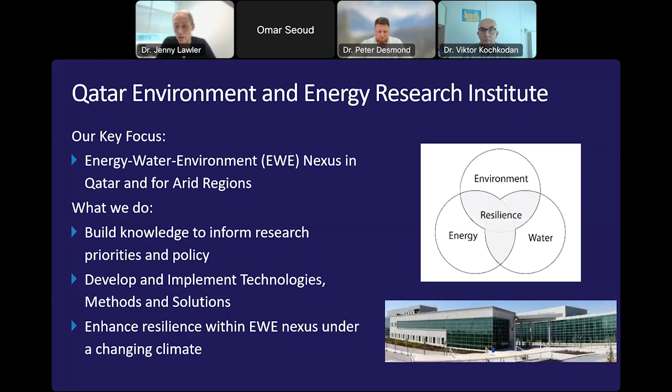Peter, maybe you'd like to introduce the Division of Sustainable Development at the college? Yeah, sure thing. So I'm coming from the Division of Sustainable Development, and we're working across also the water, energy, and food nexus.

We offer PhD and master programs in sustainable environment and sustainable energy. We have around 6 faculty in all, each representing an area of the water, energy, and food nexus, similar to QEERI's approach, how they integrate and complement each other. As a result, this gives us a way to work collaboratively to find solutions for sustainable growth within Qatar and the region in arid environments.

Yeah, that's fantastic. And I think it's important to note that we have a very nicely developing research ecosystem here in Qatar. Hamad bin Khalifa University is just one of the research performing entities here. Hamad bin Khalifa University and QEERI were founded in 2011, so quite well developed at this point, making a good impact on research for the nexus within the country.

So the focus today is on Qatar's water sector and sustainability in water for arid countries such as Qatar. Some of you may or may not know that Qatar is classed as an extremely water scarce country, so we have very, very little in the way of freshwater resources available. Although it seems that we have absolutely no scarcity of water at all.

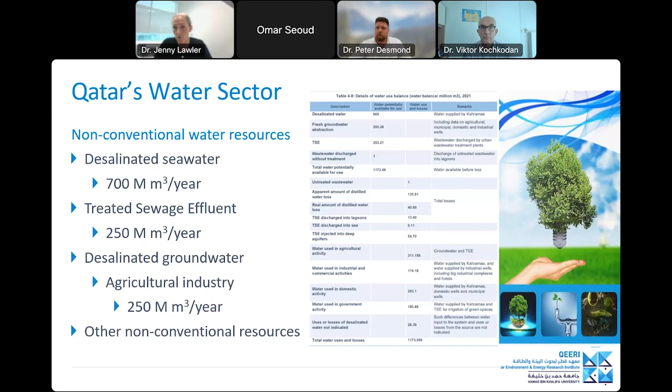So we have a really good and thriving water and wastewater sector in Qatar. There's been a huge amount of investment into it and a huge amount of thought put into it in terms of management of it as a water sector.

So I'll tell you a little bit about desalination first. As I said, we're surrounded by salty water - it's all around us and under our feet in the ground, and we're reliant on desalination technologies. Speaking to people who live here, the general public tends to be a little suspicious of desalination, the quality of water produced, and whether it's safe or not. Hopefully we'll dispel a few of those myths or assuage a few of those fears today.

In Qatar, there are two major ways we're desalinating seawater for municipal use: thermal desalination and membrane desalination. The thermal plants would have been the first desalination plants established in Qatar and across the GCC, back as far as the 1950s, when we first had a large-scale desalination plant here in Qatar.

It's a process that's typically been dependent on the electricity production process. When you burn gas in a gas turbine to produce electricity, you also produce heat from burning the gas, and that heat is used in thermal desalination to purify the water. Similar to using heat to boil a pot of water or a kettle, the steam that comes off doesn't have any salt in it. That's then condensed, going from vapor back into liquid form, and it's pretty much salt-free. That's the thermal desalination process.

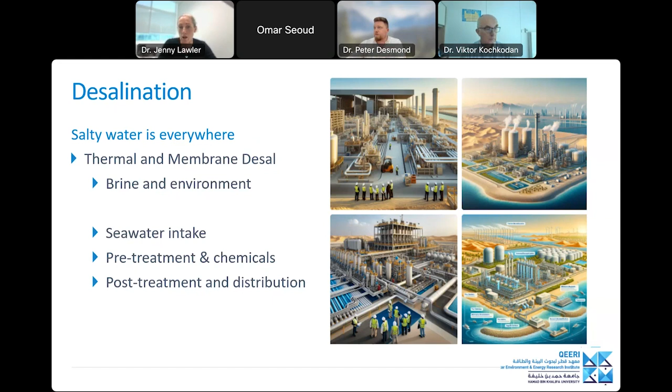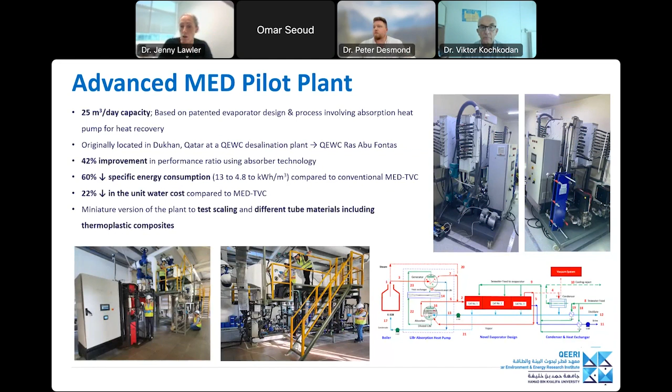Just a little plug for where research can come in: QEERI Research in Desalination Brine Management is quite advanced. We have a pilot plant in Ras Abu Fontas, one of the desalination plants, and at other desalination plants around the place, where we're looking at improving energy efficiency, decarbonising the sector, and hopefully minimising the impact of brine on the marine environment.

So then the other side of the coin is you've received this desalinated seawater at your house. Now it's high quality, it's fresh. You can use it for cooking, for drinking, for all of your household needs. And we also use it in industry for cooling, for construction, for car washing, and everything like that.

The other side of the coin is the wastewater. We have extensive wastewater collection networks managed by Ashghal, the Public Works Authority, and we have very high class wastewater treatment plants in Qatar.

That treated wastewater, which comprises municipal wastewater, industrial wastewater, even shallow pumped groundwater, is mandated under Qatar National Development Strategy for 100% reuse.

So Qatar is very advanced in that regard, and it's extensively reused in district cooling. If you live at the Pearl or Lusail or other areas that have district cooling, it's almost 100% reuse water that's in the cooling systems.

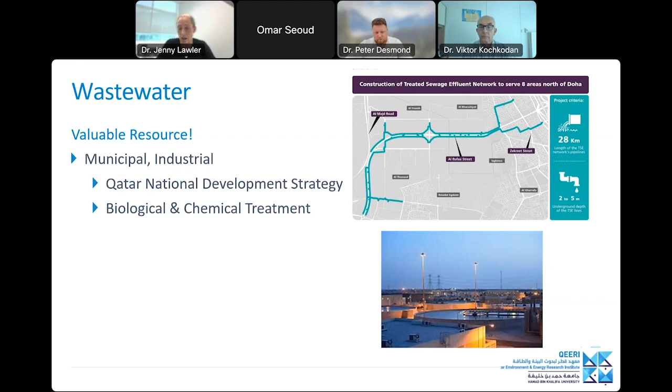And we also reuse it extensively in irrigation of landscaping, and also in the growth of fodder in the country, and then in other non-drinking water or non-potable needs, such as in construction.

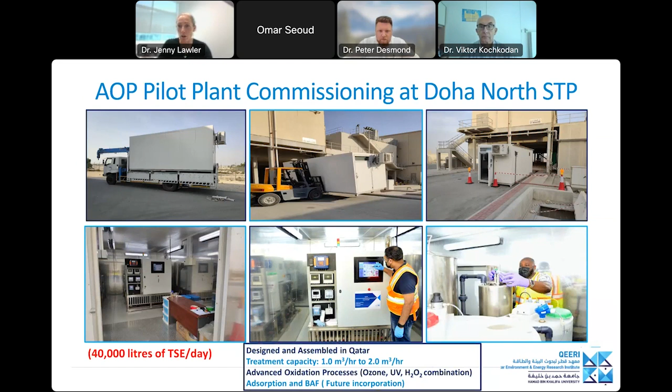And just another little plug there, QEERI has a pilot plant in Doha North Wastewater Treatment Plant, which looks at final polishing and improving the quality of that type of water.

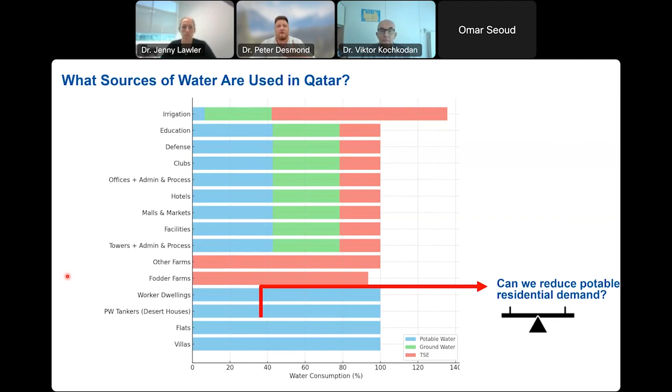But one of the challenges that still exists is the extensive use of potable water for perhaps non-potable application within residential settings, in terms of apartments or offices or within villas. And so the question is, what can we do ourselves as individuals to lower our water footprint, combining with some new innovations in the area of urban water management.

But we can have extensive treatment, and certainly what's been done in Qatar is reuse of the wastewater. So we see mechanical treatment, biological treatment to remove some nutrients or organics, and then an extensive post-treatment to bring the water quality up to a suitable level to allow it to be reused. This is typically where the TSE is coming from, and how it can be distributed in its dedicated network for purposes of irrigation or also cooling.

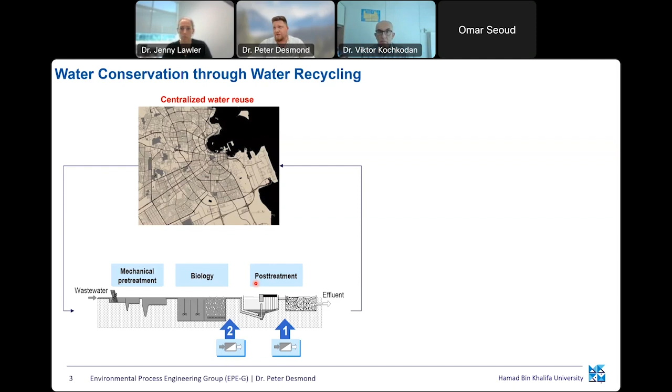So this is what we would call an example of centralized water reuse. Qatar is doing a really incredible job in the implementation of centralized water reuse through the operation of dedicated water reuse facilities, but also dedicated water distribution networks, having a potable distribution line and also a treated sewage or recycled water distribution network, running in parallel as a fully segregated system.

And Qatar is also doing a very good job in the concept also termed decentralized water reuse. So we look here at water reuse not at a city level, but within an individual unit within the built environment. This could be an office building, this could be your own villa, it could be your own home. There's many ways in which we can have the aspects of decentralized water reuse.

So what we see here is collection and separation of different types of water. We see gray water being collected from hand washing or shower areas, separated from black water, which is coming from the toilets, within buildings of truly sustainable developments. We'll see an example of what we mean by that in the next slide. We're able to collect these different water streams with different degrees of pollution and then treat them for different applications. So we see collection of gray water, from hand washing, and ultimately we are able to use this for irrigation.

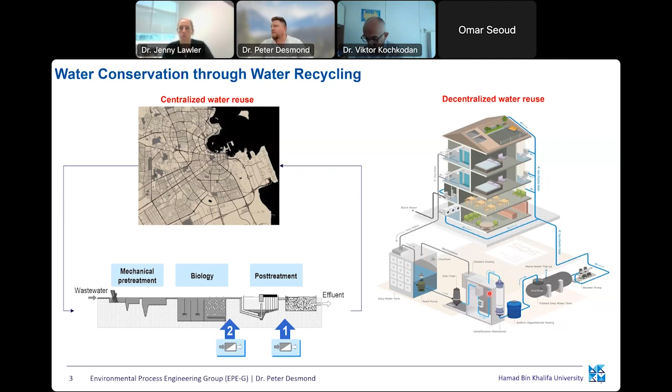We have an example of this in Education City, where we have the possibility to reuse grey water for non-potable applications. When we think of decentralized water reuse, Qatar again is leading the way. We see the development of Msheireb Downtown, which has reported source separation of grey water from black water, which reduces dependency on potable water, in this case for toilet flushing.

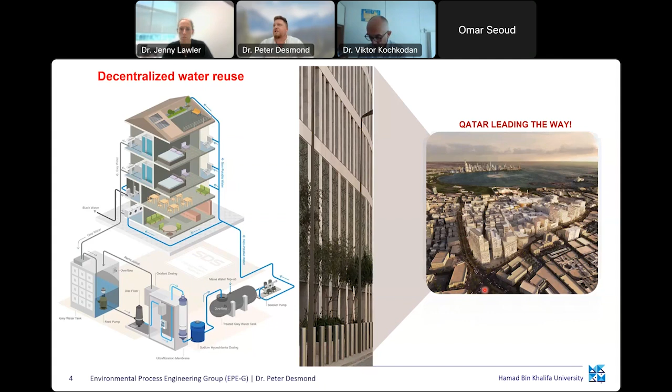As I understand from publicly available information, toilet flush water in Msheireb Downtown uses TSE, facilitated ultimately by source separation. Also within Education City, we have source separation of grey water from black water, and this serves as an ideal test bed or living laboratory to study the use of treated grey water for potential irrigation of blue-green infrastructure.

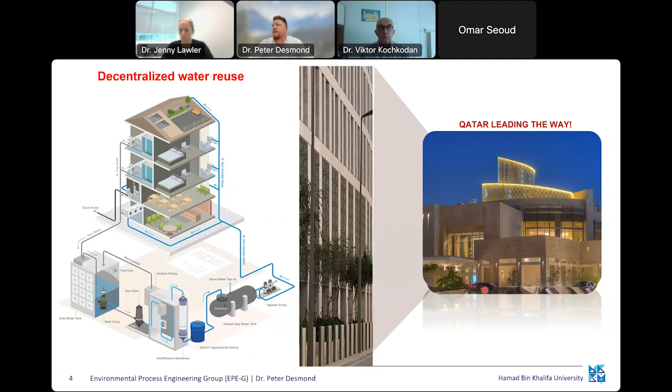When we look inside our own homes, we see potential for recovery not just of water but also nutrients. It's possible to separate solid and liquid waste streams within the bathroom, allowing us to recover urine, nitrogen, phosphorus, and potassium, which makes for an ideal fertilizer.

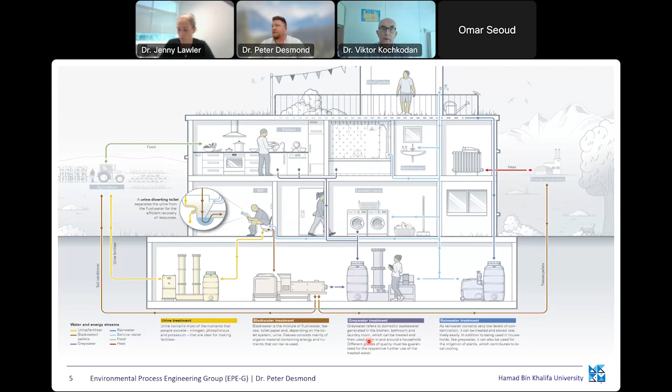We have the possibility for black water treatment, largely solids or organic material containing a source of energy or nutrients that can be reused. The highlighted area refers to grey water treatment, domestic water from kitchens, bathrooms, and laundry rooms, which can be treated and reused around the household. There are multiple examples in the world and in Qatar where grey water is a subject of extensive research, and not only research but also implementation in the real world.

So what could a property owner do to implement some of these technologies? On the left-hand side, we see a nice product developed by the Swiss toilet manufacturer, believe it or not, Laufen. Ultimately, this is a source separation toilet.

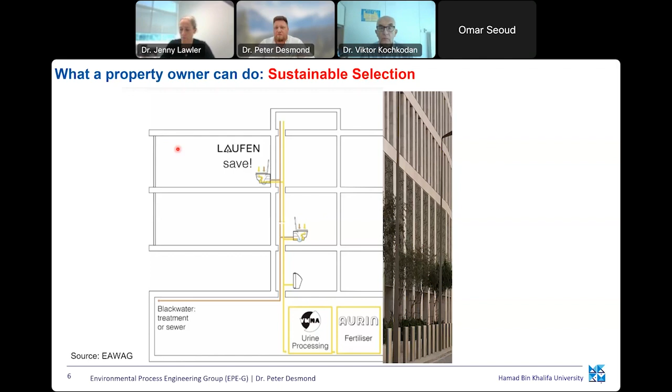It's all well and good to have these academic concepts, but we need to get these technologies and concepts into the market and into the hands of the consumer, so they can implement their own sustainable development strategy, whether at work or in their own lives. One highlight we'll feature is a consideration for if you're building your own home or residence, at the premise level, of what you could do to reduce your water footprint on a technological level.

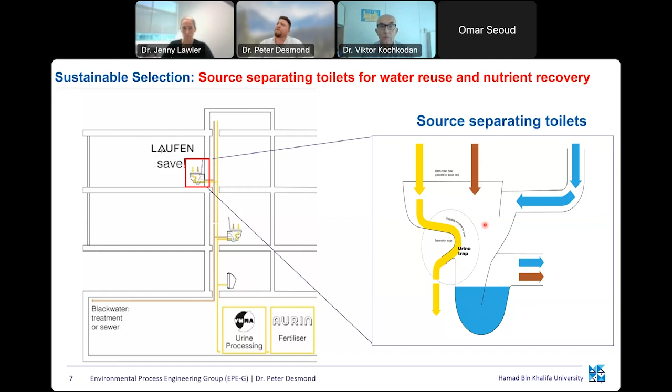The product here from Laufen is a source separating toilet. We're able to separate the urine through a novel construction, a urine trap, and we see separation of solids as well, giving us a separation of solid and liquid streams. This source separation is a key facilitator for recovering different nutrients and reducing burden on the potable water supply.

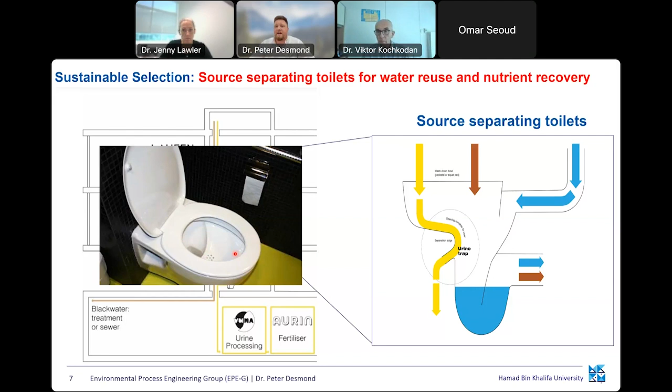This is an example of the toilet implemented at EAWAG, the Swiss Federal Institute of Aquatic Science and Technology. We see here the different collection points for the various waste streams, integrated within a municipal building, and these have now also been implemented in Switzerland in residential buildings as well.

Another example of a potential starting point on becoming water wise could be engagement with initiatives in Qatar. With Tarsheed, they have available a water and energy consumption calculator on their website, so when thinking about your own residence, your energy or water usage in a specific room or in your backyard, they give you the option to calculate water or energy demand based on what utilities you have installed. It's a fantastic tool from Kahramaa and the state of Qatar to, as they say, keep Qatar pulsing, so you can consume wisely.

The key message here is to consume your water wisely.

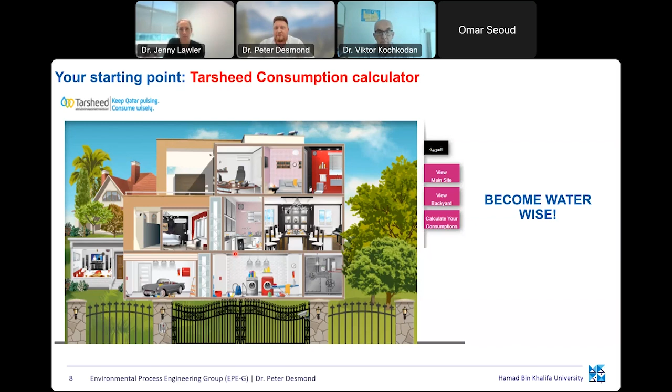That's awesome, Peter. I learned a lot there. Very cool innovations. We've got some, but definitely we could have more innovative things in our households. Hopefully we'll hear from the audience about what they've been doing to be water wise.

I'll bring in a couple of questions from the audience. We've been asked, when we use treated but non-potable water for agriculture, some vegetables absorb and store a lot of this water. Is it still safe to eat them?

In Qatar, we're not using treated water to grow any edible food crops, only for fodder crops, but it is done extensively in other countries, and we import foods from those countries, so they are widely available on our supermarket shelves. So is it safe to eat them?

Any country using treated water for growing crops will have regulations governing the quality of that water. Typically the water quality will be high, so yes, it should be safe to eat them. Any imported foods we eat here undergo quality control, both at the port of origin and when they come into Qatar. So the short answer is yes, it is typically still safe to eat them.

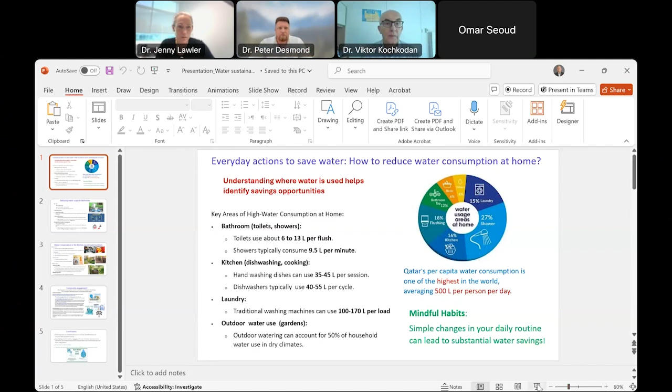Perfect, so let's go to the final topic of our panel today. We will talk about what everybody can do at home to reduce water consumption. But first, we need to identify where we have these water saving opportunities.

If you look at the diagram here, we consume 27% of water in the shower, 30% for toilet flushing and bathroom tap, 16% kitchen, and laundry. The main areas of high water consumption at home: toilets use about 6 to 13 liters per flush, showers typically consume about 10 liters per minute. In the kitchen, hand washing dishes can use 35-45 liters per session, and dishwashers usually take about 40-55 liters per cycle. For laundry, a typical traditional washing machine can spend about 100-170 liters per load.

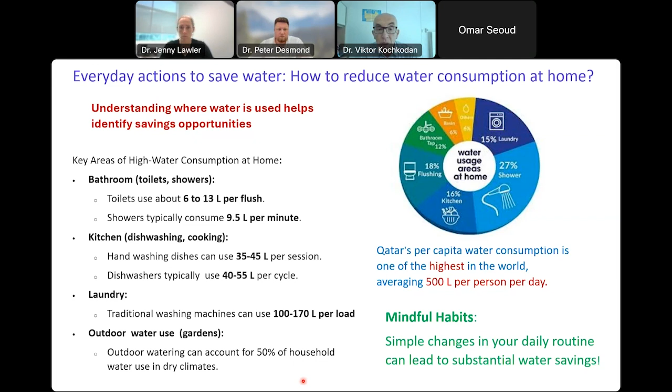For outdoor water usage, especially in Qatar, it can account for more than 50% of household water usage in this climate. That's why Qatar's per capita water consumption is one of the highest in the world, averaging about 500 liters per person per day. Just a simple change in your daily routine can lead to substantial water saving.

So what can we do for water conservation in the bathroom? The key tip is fix leaky toilets. Leaky toilets can consume a lot of water, and water waste can be between 700 and 15,000 liters per day, depending on how severe the leak is.

Another tip: instead of a bath, which uses about 200 liters of water, take showers - but not only take showers, try to reduce the time for showers. For example, a 10 minute shower consumes about 90 liters of water, but a 5 minute shower saves about 45 liters. For a family of 4, over 1 year, you can save about 35,000 liters of water.

And of course, a very simple but important tip: don't leave the tap running while brushing your teeth, because you will consume about 15 liters of water when you only need 1 glass, about 200 milliliters, to brush your teeth. For a family of 4, using this tip, you can save about 11,000 liters of water.

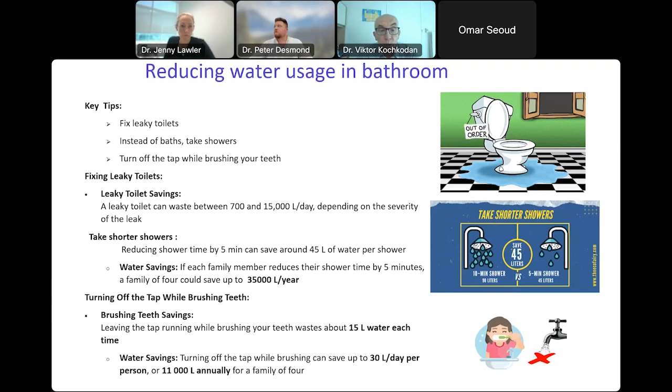Water conservation in the kitchen, laundry, and outdoors. For the kitchen, a simple tip: don't let water run while washing dishes by hand. Just fill your sink with water and wash your dishes. Instead of running water while washing or peeling fruits and vegetables, use a large bowl, and you can save a lot of water. When cooking, use only the amount of water required, don't use a lot of water. And for laundry, run it only with full loads. This will help you save some water.

For outdoors, because we live in a hot climate, use drought-tolerant plants because they require less water, and try to water your gardens early in the morning to reduce evaporation. In this case, you can save about 20 to 30 percent of water.

If you can, try to install drip irrigation. It can save about 50% of water, and you will use only 30 liters per hour compared to a traditional sprinkler system, which is highly water consuming, about 1,000 liters per hour.

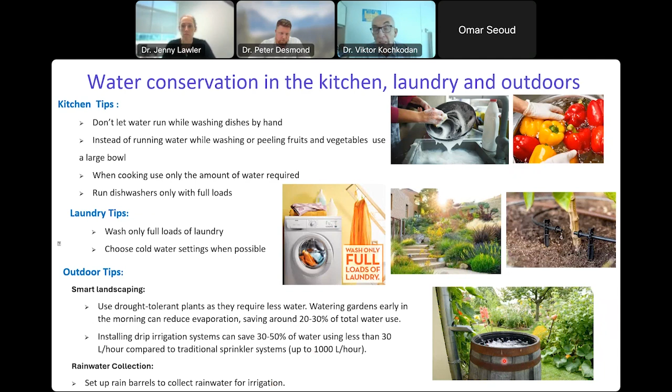And rainwater collection - we don't have rain very often here in Qatar, but sometimes it rains quite heavily, and we can collect a lot of water. Try to set up some barrels to collect this rainwater and use it for irrigation in your gardens.

But reducing water consumption at home is not just individual responsibility - it's very important to be involved in some community actions. Here in Qatar, Qatar General Electricity and Water Corporation, Kahramaa, has very interesting and important programs and initiatives. Peter mentioned the Tarsheed campaign - its aim is to educate Qatari people on conservation and efficient use of water and electricity. This program was launched in 2012, and up to date it has helped save more than 1.8 billion cubic meters of water in Qatar.

In Doha, Qatar, Kahramaa established an awareness park in 2017 to educate the public about water consumption and to show the latest technologies in water treatment. If you visit this park, you will be amazed - it has very interesting and fun activities you can have there.

Kahramaa also provides very useful resources and tools, water saving tips, and water saving devices. When you install these devices at your home, you can have about 20 to 40 percent of water savings.